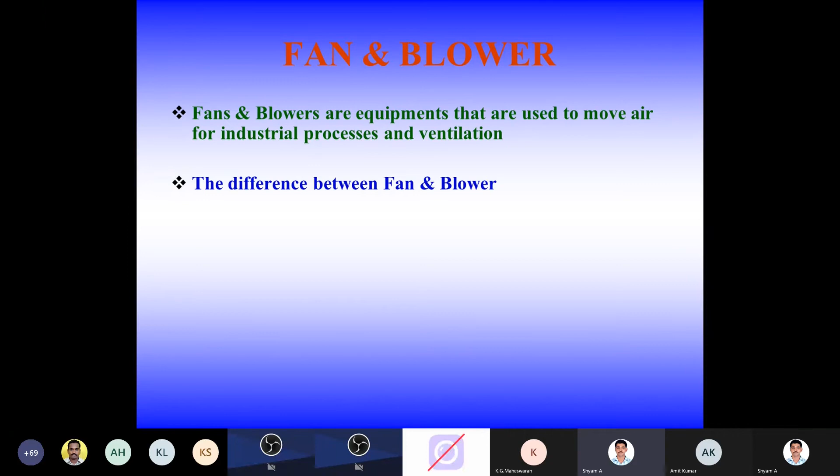Fans and blowers are equipment used to move air for industrial processes and ventilation. The difference between a fan and a blower is: fans will have a specific ratio up to 1.11 and a pressure rise of 1136 mm water column, whereas blowers will have a specific ratio between 1.11 to 1.2, where the pressure rise shall be 1136 to 2066 mm water column. Anything above this specific ratio and pressure rise would be called a compressor.

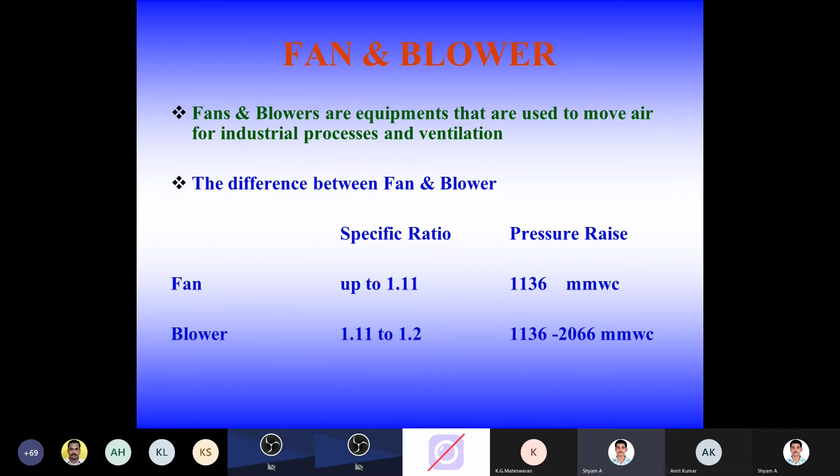So now we go into the types of fans. There are a few types of fans, like axial flow fans and centrifugal fans, which are widely used in the market. There are other types of fans also, like mixed flow fans, or you may call it an impulse type axial flow fan, or cross flow fans.

The major contribution in the industry are centrifugal fans and axial flow fans. Axial flow fans can have three types: propeller, tube axial, and vane axial. Centrifugal fans are of different types depending on the blade angle and configuration: radial straight bladed fans, radial tipped fans, forward curved fans, backward inclined blade fans, backward curved fans, and aerofoil bladed fans.

Though they are centrifugal fans, they may be named after the application. For example, in a power plant boiler, we may have an ID fan, a PA fan, and an FD fan. But all these are centrifugal fans; they are just named after their applications.

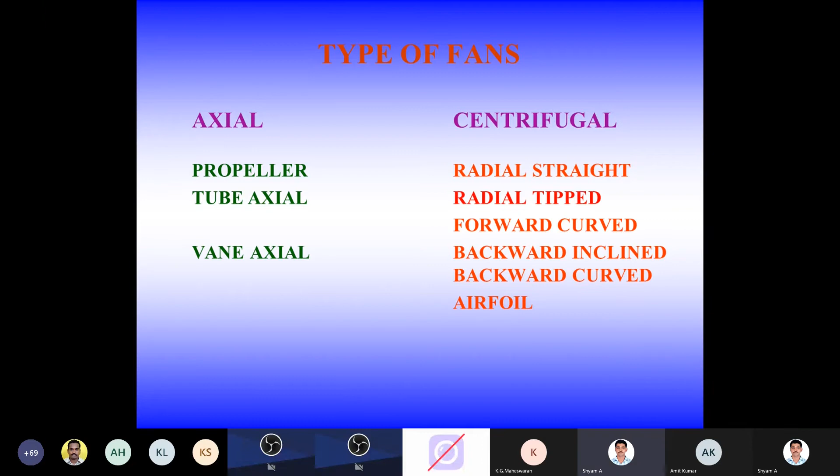How to differentiate? Axial fans are so called because the flow enters axially and leaves the fan axially. That is, the flow at inlet and outlet of the fan is parallel with the shaft axis, so it's almost like entry and discharge are at 0 to 180 degrees.

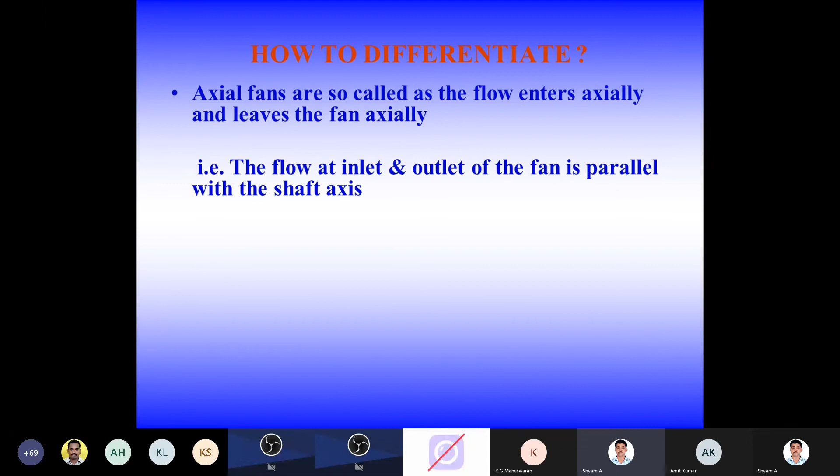The centrifugal fans have an axial entry and the flow leaves the fan radially. That is, the flow at inlet is parallel to the shaft axis and the exit is at 90 degrees from the shaft axis. So they may sometimes even be called radial fans, just because the entry is axial and the delivery is radial.

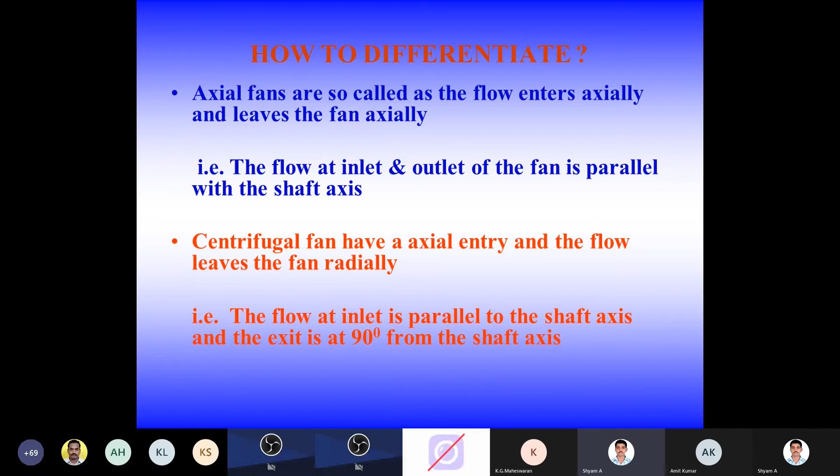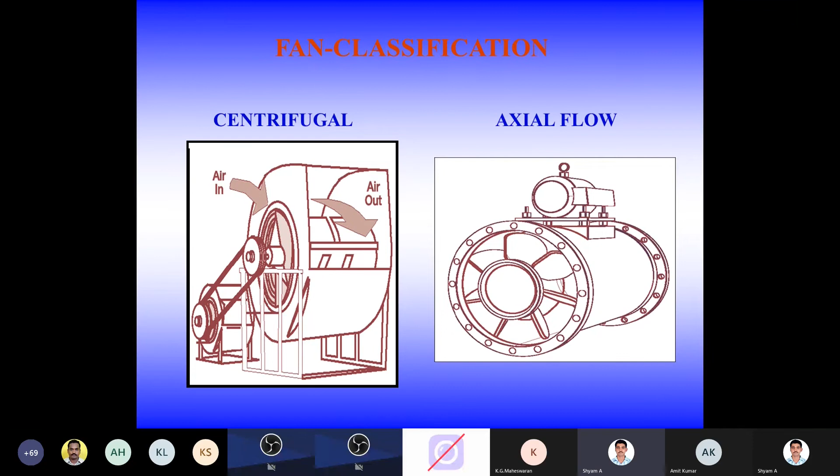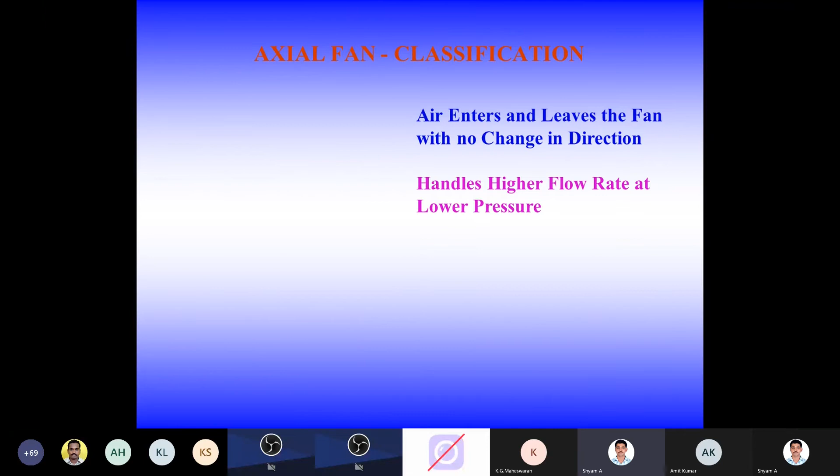So this is how a centrifugal fan will look and the axial fan will look. The axial fan classification is such that air enters and leaves the fan with no change in direction. These axial fans can normally handle high flow rates at low pressures.

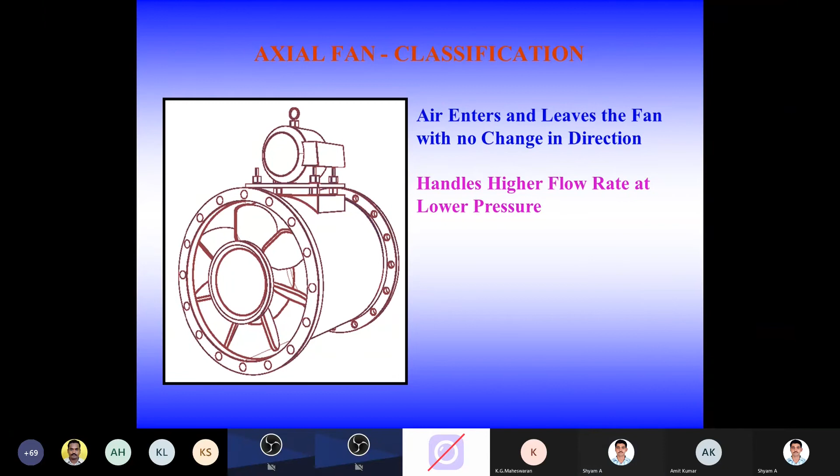The axial fan components shall be motor, blades, hub, and casing. In the case of a propeller fan, it is only the mounting bracket, blades, and the motor. In the case of a tube axial fan, this propeller fan may be installed into a tubular casing with the motor and the hub. The vane axial fan will be similar to the tube axial fan, with a vane at the inlet and outlet, or either one place. These vanes help the air by acting as an air straightener to the flow.

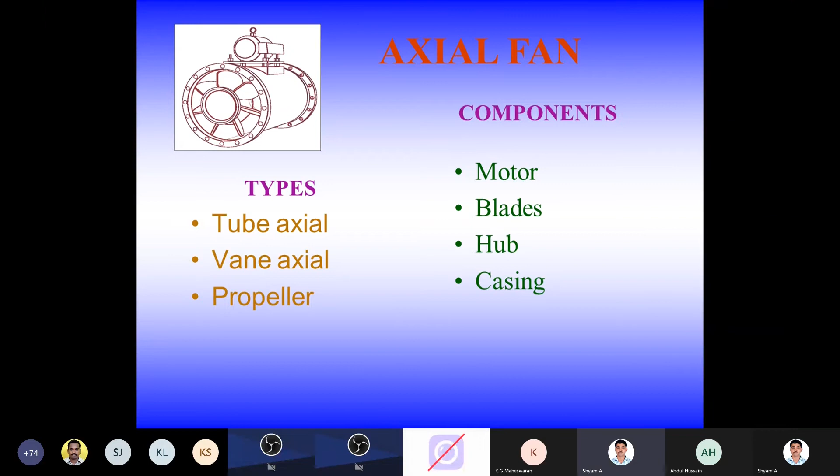Tube axial fans normally have their pressure range limited to 100 mm, but they can give a very high flow with high diameters. Their efficiencies are much limited, to around 65%. The wheel is in a cylindrical housing with close clearance. Only if the close clearance is maintained do you get a better efficiency, which I will show you in a picture in the later slides.

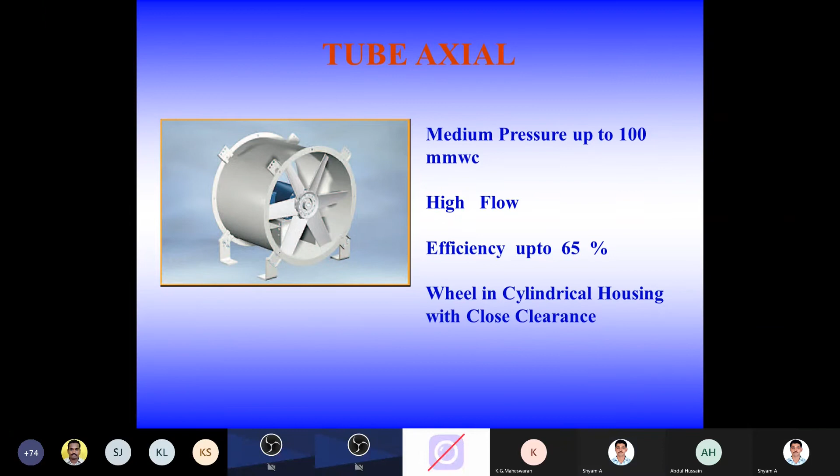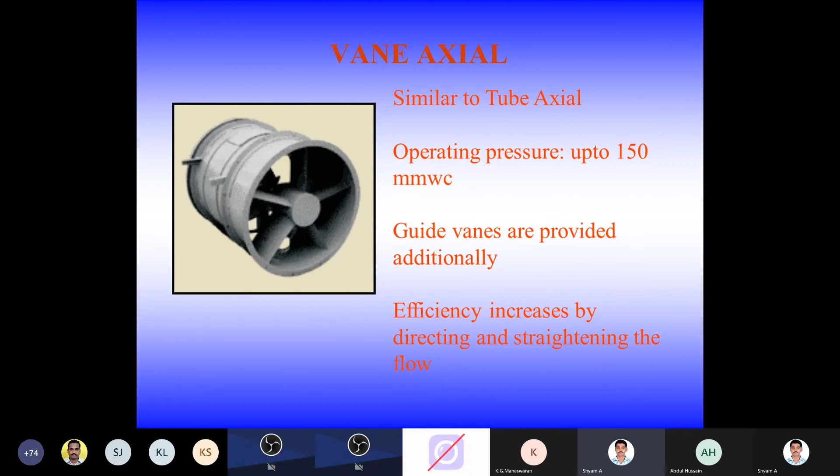As I told you earlier, these propeller fans are often used in indoor applications like exhaust fans, and even your ceiling fans also come under the propeller fan category. They run at a very low speed and moderate temperature. This can handle a huge volume of air with very minimal pressure, and the efficiencies are very low, even below 50%.

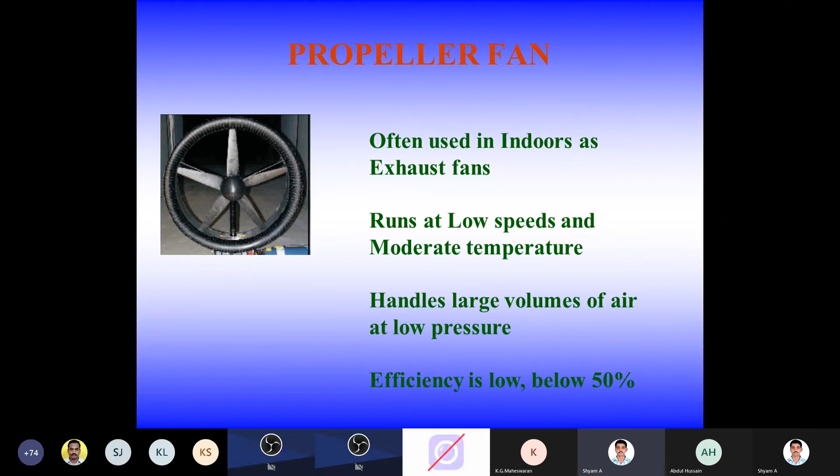Now, coming to the application of the axial flow fans, they are widely used in air conditioning and ventilation, that is HVAC, and they are also used for fume exhaust systems. They are used as booster fans in duct systems, and similar fans, now called jet fans, are used in car park ventilation and such. These vane axial fans are most widely used in tunnel ventilation and mine ventilation, because that is a place where you require more thrust and a greater pressure drop requirement.

So in the case of a centrifugal fan, the airflow changes direction twice, when it enters and when it leaves. It can generate high pressure per stage at lower flow rate. The number of stages is limited, whereas in the axial flow fan, the number of stages can be more.

But we have seen fans, we have even made fans with 5 stages, and they have been working successfully. Smaller sizes can be made even on a single rotor shaft, or individual bigger size fans will go from one fan to the other. So 5 fans at a stage, like in mini blast furnace applications.

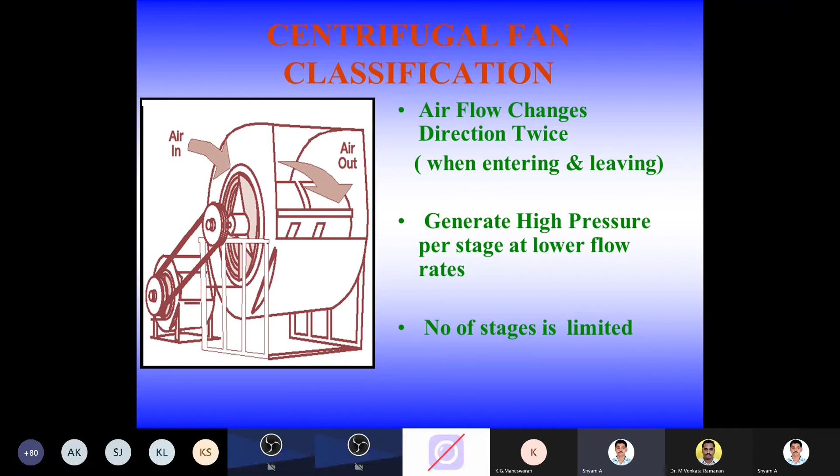As we discussed earlier, there are different types of blades in a centrifugal fan: backward curve, forward curve, radial blades, backward inclined blades, aerofoil blades, and radial tipped blades. So the components are the impeller with the hub, the motor, of course the prime mover, the casing, that is the spiral casing or volute casing as we call it, the inlet cone, and the shaft.

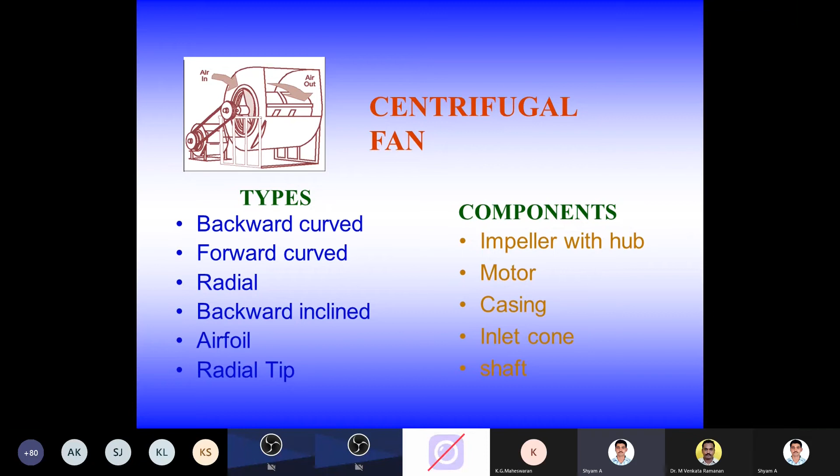So these are the components in a centrifugal fan, where apart from this you may have the drive pulleys and belt, or if it is going to be a coupled drive, then you will be having the coupling and the coupling guards.

The centrifugal fans can achieve high pressure. So pressures of even up to 3100 or 3200 mm are possible in a single stage centrifugal fan, but it depends on the volume also. Flow drops directly with the head, meaning when the flow is dropping on the curve, if you see the curve and the flow is getting reduced drastically, the head also drops drastically with it.

Useful in appliances that are not prone to clogging. So here there should not be any clogging, because fibrous material or something like that cannot come through this fan.

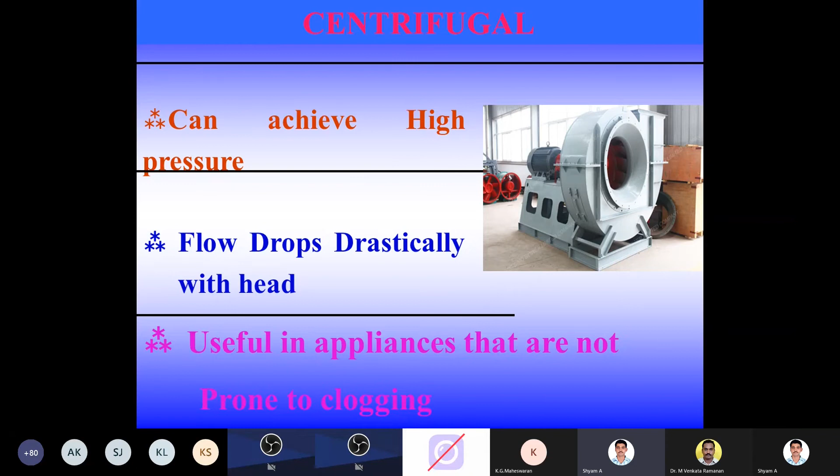Centrifugal fan blade design. In this picture, there is a casing, a spiral casing, and a rotor inside, and you will find the blades. You will find that there are 6 configurations here, and you can see the blades there.

Radial blade: a straight blade, nothing but a straight blade. It is attached to the hub, and these straight blades sometimes may have a shroud in the impeller. Normally the impeller will have a back plate, blade, and a shroud - these are the 3 components in a centrifugal fan impeller.

In a straight blade impeller, where some amount of higher granular material is coming into the impeller, we offer it without the shroud - it is called an open impeller. If there is a shroud, it is a closed impeller. This impeller has very low efficiency, but it can handle material. The blade has an inlet and outlet angle of 90 degrees.

To achieve better efficiency, something similar to this radial fan is a radial tipped fan. The radial tip fan will have a curve at the entry of the blade, where the entry is not at 90 degrees. This gives a smooth flow for the medium, but the exit angle would be 90 degrees - it is radially tipped. These can be used for higher efficiency, just to improve the efficiency. I will tell you the application in the next slide, where I will explain.

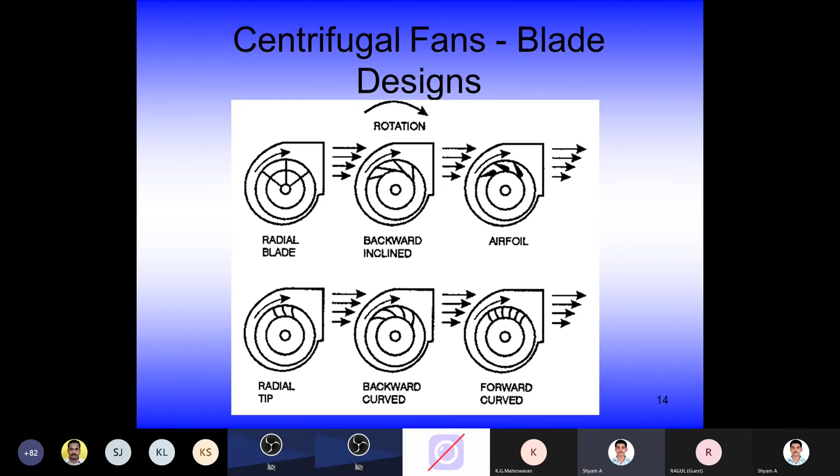Here we can demonstrate what would be the flow, pressure, temperature, airstream, and efficiency for all these impeller types. The radial will have a medium flow. It can give high pressure because of the blade angle. It can withstand high temperature. The airstream can even handle contaminated air. The efficiency is very low. As flow increases, the power increases.

For the radial tipped impeller configuration, they will also handle the same medium flow, high pressure. They can also handle high temperature and contaminated airstream. The efficiency is a little higher than the radial impeller, but not more than the backward curved impellers. There also, as the flow increases, the power increases.

Forward curve impellers have a higher flow, but limited pressure - medium pressure, not more than around 200 or 220. Their temperatures can only handle low temperatures. Airstream should be clean, because the number of blades is very high - they range from around 34 to 64, depending on the size. The efficiency is medium, and as the flow increases, the power also increases.

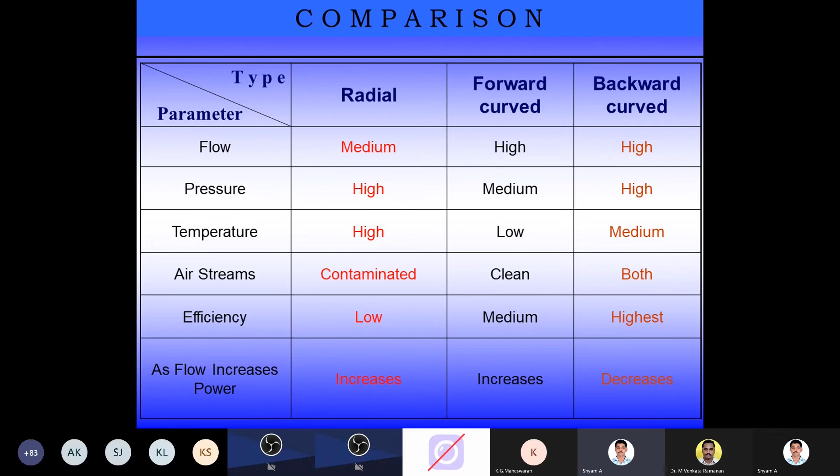Now the applications of various types of blades in the centrifugal fan, axial propeller, and vane fans. Radial fans are used in various industrial applications, suitable for dust laden air, moisture, and gases.

Forward curve fans can handle only low pressure, so they are suitable for HVAC. Packaged units are suitable for clean air.

Backward incline or backward curve and aerofoil fans are used in HVAC, but they may be huge in size compared to the forward curve in HVAC. In various industrial applications, such as FD ID or other process industries, centrifugal fans are used with backward curve or backward incline designs because of their efficiencies.

Propeller fans are used for air circulation, ventilation, and exhaust applications. Tube axial fans are again used for HVAC, and they can also be used in drying ovens.

Normally these tube axial fan blades are made of aluminum die cast, either gravity cast or, today, pressure die cast. They can also be made of non-metal blades like nylon, GRP (glass reinforced plastic), polypropylene, and other plastic materials.

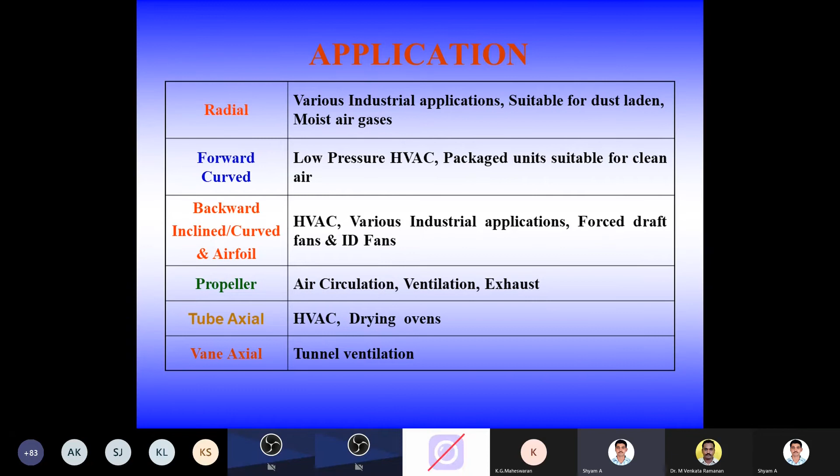Vane axial fans are used in tunnel ventilation. They are somewhat rugged because they are roughly used and continuously operate at high temperature. The blades are made of aluminum alloy, and they have vanes at the inlet and outlet, or sometimes only on one side, which straighten the air, giving a smooth airflow.

So here I am going to demonstrate the individual types of blades in the centrifugal fans. Why we are concentrating more on these centrifugal type fans is that 85 to 90% of the process industry power consumed is only by centrifugal fans.

Whether you take the cement industry, the sugar industry, wherever there's a boiler application, the metallurgy industry, the refinery, or even the fertilizer industry - these centrifugal fans consume more than 85 to 90% of the power used by fans in the process industry.

So they have a rugged blade design, and because the blade is at 90 degrees, they are called self-cleaning impellers, but their efficiencies are very low. So in today's technology, these type of impellers are not much used.

They are being replaced with radial straight, radial tip, or backward curve designs. So what happens is, if you go for a backward curve impeller, you may have to take care of the erosion, as I told you in the earlier slide.

Used for material handling due to blade strength, moderate to high pressure industrial application. The power rises continuously to free delivery - that is, once there's no resistance and the fan is at free open, that is free air discharge, the motor will overload.

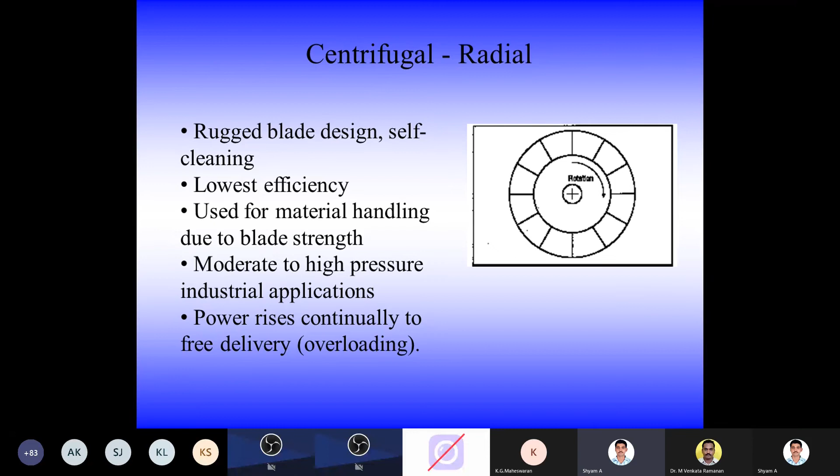The radial tip is just a configuration of the backward curved and the radial blade. So the blade is radial at the outer edge of the wheel, curved in the direction of flow as it moves inward. More efficient than radial blades, used for mildly erosive environments, with higher pressure than aerofoil fans or backward curve fans.

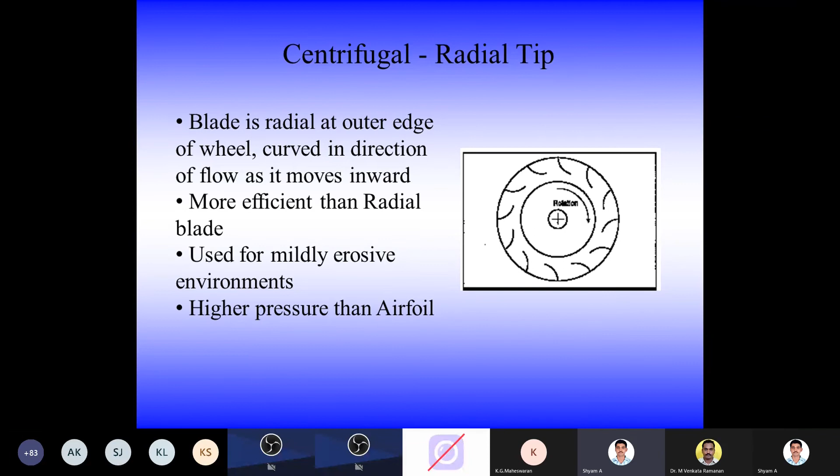The centrifugal forward curve impeller has blades curved forward in the direction of rotation, at about 90 degrees angle. Low pressure, used in HVAC applications and also in window ACs. Lower speed than other centrifugals because of their lightweight construction, with a single thickness blade and lightweight construction.

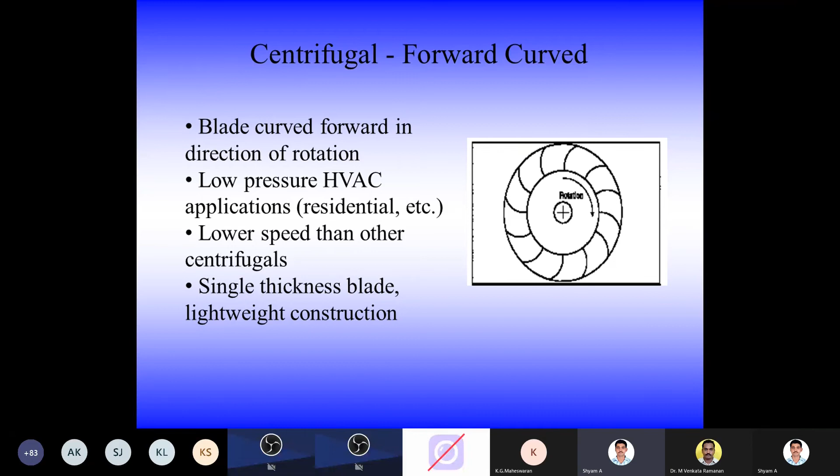Centrifugal backward inclined blades. So after the radial, you find the centrifugal backward incline. These impellers can discharge very high flow rate. Efficiency is slightly less than aerofoil design, but more than the radial tip impeller. Power reaches maximum near peak efficiency and then reduces towards the delivery.

This is a very important point in a backward inclined blade. At any point of operation, at a given temperature and given speed, this fan, even at free discharge, will not overload, because as you go through the curve, the power curve will not be in the rising direction. At the end of the curve, it will drop back. So these fans are almost called limit load fans.

Consideration for use in applications where aerofoil blade erosion is a concern. I told you in the previous slide, aerofoil blades cannot be used in applications handling dust. The reason is it may erode the blade, and the hollow space inside may get filled with dust particles, which may increase vibration due to imbalance.

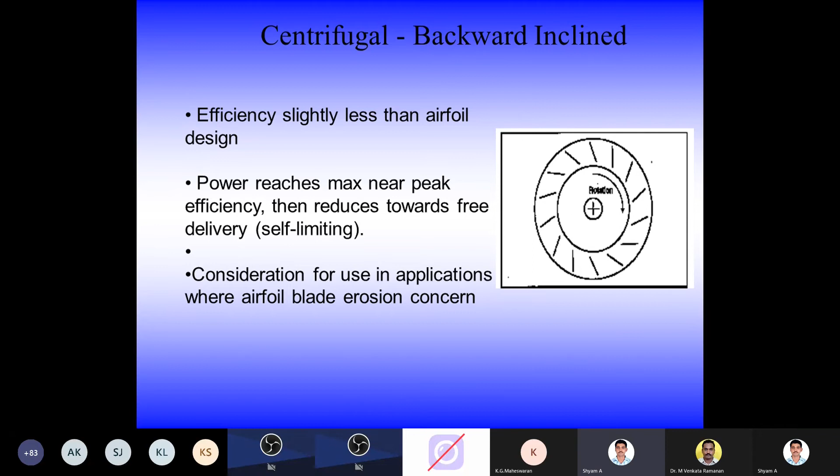The centrifugal backward curve fans have blade angles less than 90 degrees. They are inclined and curved. The power reduces towards free delivery.

These are also, in some cases, if they are not high pressure, not narrow impeller, but a high width impeller, then they are also limit load fans. They promote smoother flow than BI, that is backward impeller, backward inclined fan.

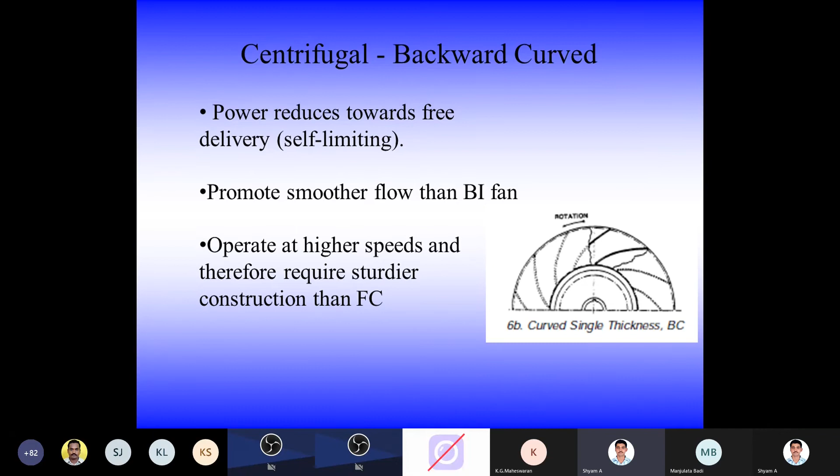These impellers can operate at very high speeds and therefore require sturdier construction than forward curved ones. But the temperature here is limited. You cannot go beyond 380 to 420 on the backward curve impeller because of the stresses acting at the edge of the impeller. In that case, we would always prefer to go for a radial tipped impeller or a radial straight bladed impeller.

The centrifugal aerofoil blades curve away from the direction of rotation. It is something similar to the backward curve, it is a backward curved impeller only, but the blade is formed in the shape of an aerofoil, which improves the efficiency, reduces the noise level, and gives the highest efficiency, relatively low noise, and high structural strength.

Power reaches maximum near the peak efficiency, then reduces towards the free air delivery. Again, these fans are also limit load fans, but not in all applications. It depends on the width of the impeller. If the impeller is narrow and high pressure, it may not apply. Only if the impeller has a broad width and lower pressures, like up to 200 mm, then they may be a limited load fan.

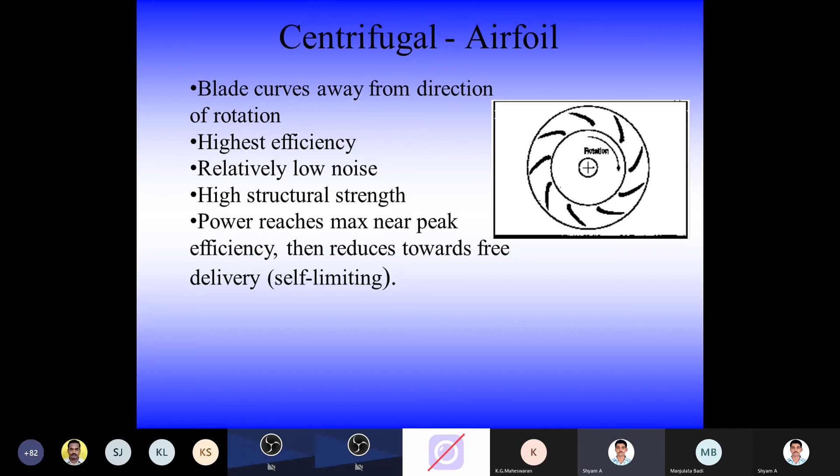Axial type fans we have already seen, but I would like to mention the pressure ranges here. Propeller fans generally operate at 5 to 50 millimeters water column. They are inefficient, with a steeply rising power curve, so their power increases when the pressure increases. It is the opposite of the centrifugal fan.

Tube axial fan: propeller mounted in a cylindrical tube. The pressure ranges up to 100 mm water column. These are also overloading type fans; if the pressure rises, the power rises.

Vane axial fans utilize guide vanes to recover the rotational energy, and they can give a pressure up to 250 mm water column in a single stage. Again, they are also overloading fans; as the pressure increases, the power increases.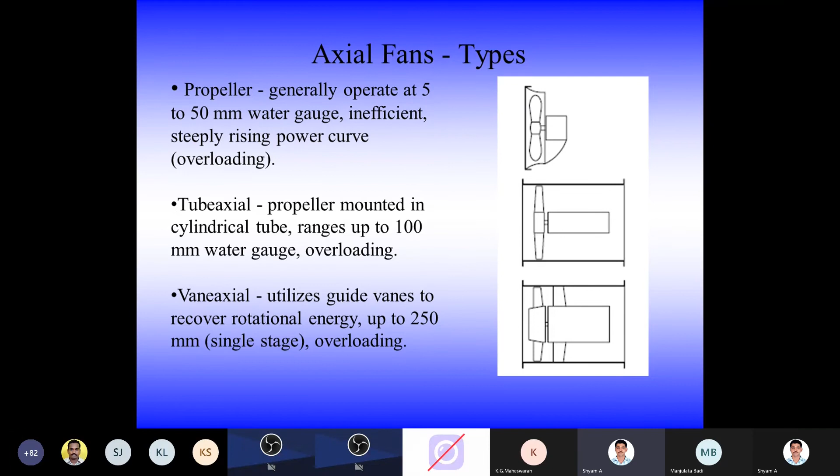See the definitions. What is static pressure? The difference between absolute pressure at a point and atmospheric pressure is called static pressure. The dynamic pressure is the rise in static pressure which occurs when air moving with a specified velocity at a point is brought to rest. So total pressure is equal to static pressure plus dynamic pressure.

So when we go for an audit on a fan, we should know that static pressure acts in all directions, and dynamic pressure, also called velocity pressure, acts only in the direction of flow. So the sum of these two is the total pressure.

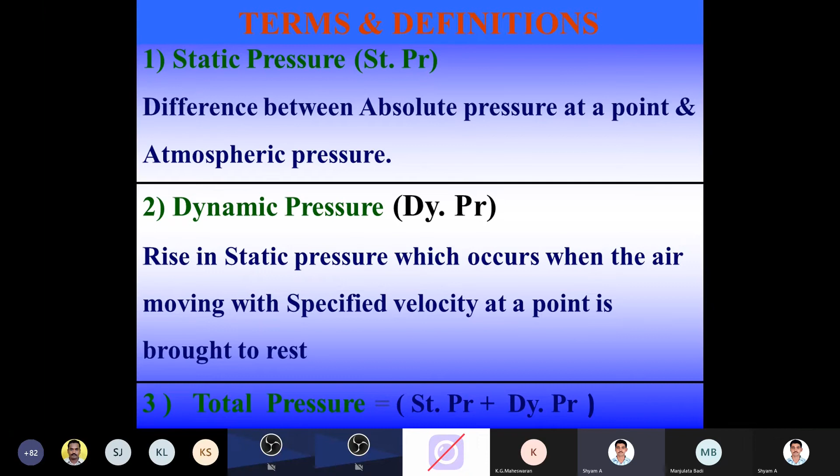How to calculate the efficiency of a fan? The fan or blower has two efficiencies: one is the static efficiency and the other is the total efficiency. So we have to calculate the static efficiency as Q in meter cube per second into pressure, static pressure in mm water column, or otherwise kg per meter square.

That is, 1 mm water column is equal to 1 kg per meter square, divided by 102 into input power into motor efficiency. Motor efficiency we can get from the nameplate data of the motor or from the data sheet. So input power is measured.

So what is 102? You are converting the output Q into H. By dividing it by 102, it becomes kilowatt. So on the upper side you have kilowatt, and below you have power in kilowatt. This will give you the efficiency.

So in place of static pressure, if you use the total pressure, it gives you the total efficiency. Normally, when a fan procurement is made or audited, we have to take into consideration the static pressure and static efficiency only.

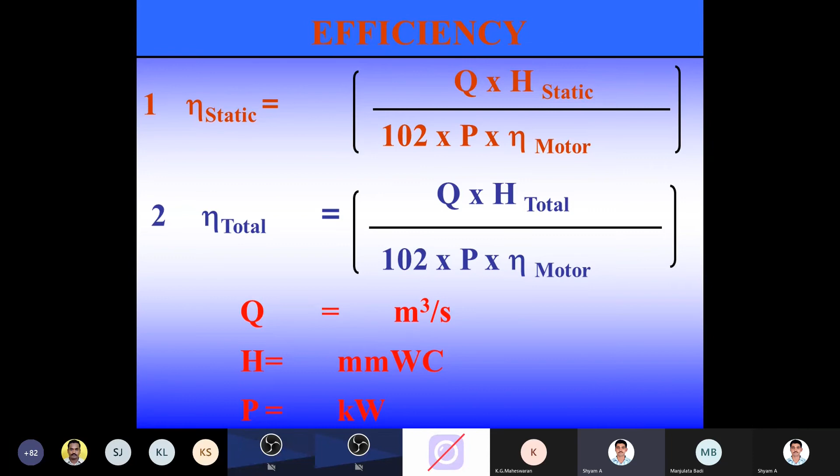Fan characteristic can be represented in form of a curve under a specific condition. The fan curve is a graphical representation of a number of interrelated parameters such as the volume, the static pressure, power, and the efficiency.

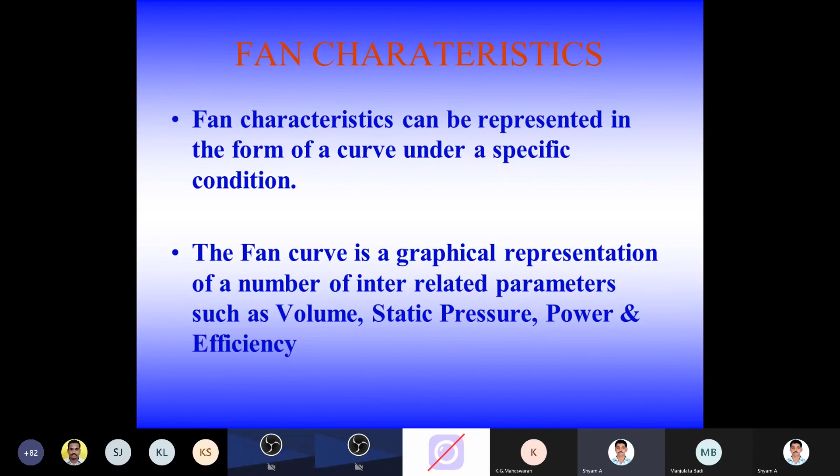So whenever you want to study a fan, before going into the audit or performance study of a fan, we need to obtain the performance curve from the client, because they would have got the curves from the supplier in their records. The curve is going to be very important for us to ascertain the design parameter of the fan, how the curve is being tested in the test block condition, and where the fan operates on the curve now. Only based on this you can ascertain what you have to do with this fan to reduce the energy consumption.

So this is the curve. You are seeing a yellow line, that is the efficiency curve, but the blue line is the performance curve, which is volume versus pressure. The flow is mentioned in CFM, and the pressure is in inches water column. The blue line is the performance curve when you test a fan in a test block condition, as per IS standard or BS standard or AMCA standard.

You need to have a test track, and you are creating a resistance artificially in the test track, and you are going to measure the velocity, static pressure. The velocity is converted into velocity pressure and then calculated with the track area to Q, that is the flow.

And the power curve, in BHP, that is the green curve. The power curve is the measured power either directly from the panel board, or the amps, power factor and all this may be individually recorded and then calculated. The input power may be calculated. From the parameters of both curves, you can arrive at the efficiency curve using the efficiency formula.

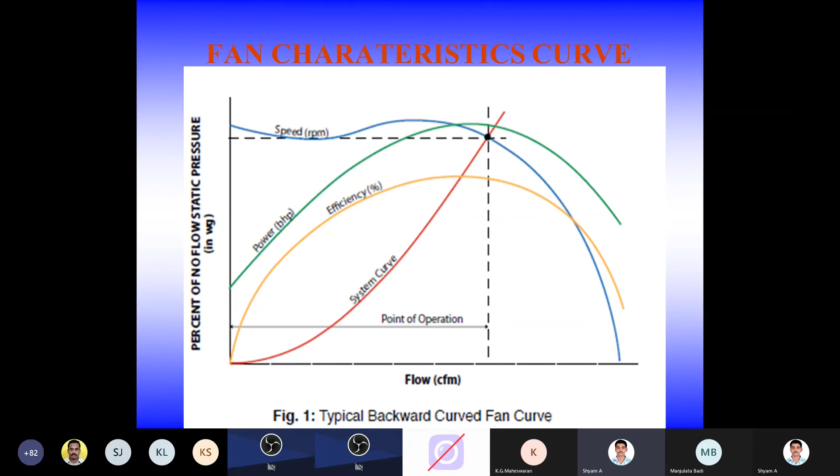So the system resistance curve is completely independent of the fan performance curve. This is a very important point which most people may not be aware of. They may think that the fan operating conditions at the site where the fan is used will only fall on the performance curve, that is the test block performance curve. No, the system resistance curve is completely an independent curve.

The two curves intersect at one point where fan performance meets the requirement of the system. That is the dark point which I showed you. The system resistance curve is described by the equation P is proportional to Q square. In case you want to enhance or decrease the performance of the fan, you have to only go by this formula.

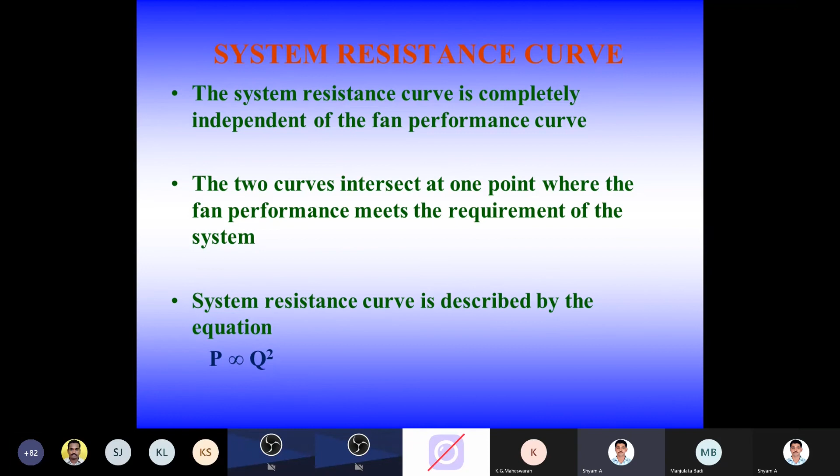This is the system resistance curve and the fan curve, so you have an operating point. When you throttle this fan or reduce the RPM, by using a VFD, your point will only fall as you reduce the speed or throttle the inlet vane control. Your point will fall on the blue curve only and not on the red curve.

And as I told you in the previous slide, this operating point will not be exactly as it is mentioned in the performance curve, because it will vary depending on the pressure in the system. For example, let us consider an ID fan where the pressure is 300 water column designed for and 10 meter cube per second. So this operating point is falling on 10 meter cube per second and 300 water column.

But when you go to the site, you have different resistance on the inlet of the ID fan. For example, you may be maintaining -5 to -10 water column in the boiler furnace, and then you may come out and there might be an economizer where there is a resistance. You will need some pressure drop across this economizer, and after that you have the air preheater where again that is a resistance.

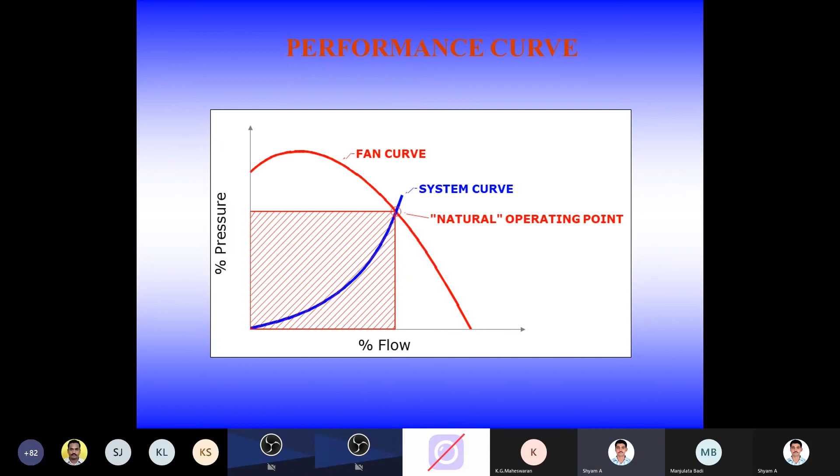Fan laws. See, the fan capacity is directly proportional to N and D cube. N is the RPM, so it is directly proportional to the change in the RPM, and it is directly proportional to the cube of the diameter differences.

So pressure is directly proportional to N squared and D squared. Power, capital N power, is proportional to N cube and D to the power 5. So when we size a fan by diameter, we use this formula on the standard diameters of the standard designs, and to arrive at the RPMs, we use this formula.

So these formulas can also be used by energy auditors when they find that a fan is delivering more volume of air, maybe it's oversized or undersized, then they can use these formulas in altering the RPMs without considering the D, to arrive at a better

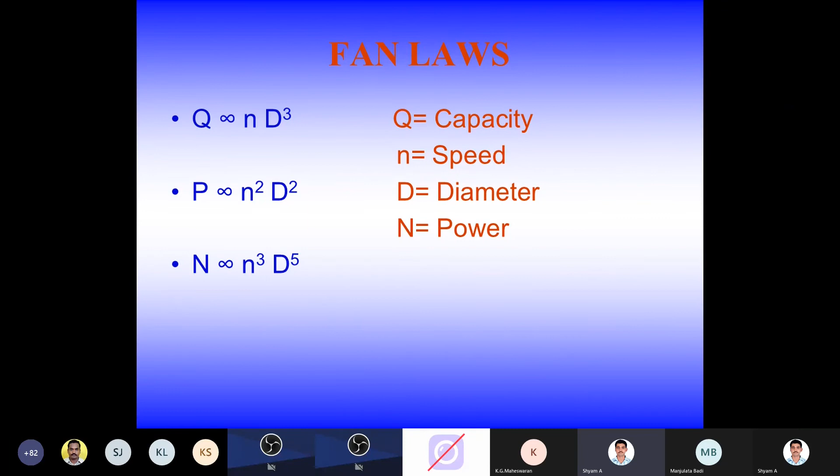So now we go into the energy conservation point. Before going into that, can I ask you if you have any doubts on these selection procedures of fans? Because I would like to say something on that. Okay, let me first complete that.

The poor initial system design or fan design contributes more to the loss of efficiency. Likewise, a tailor-made fan is designed particularly for parameters like volume and pressure, maintaining an efficiency of more than 80%. Whereas with standardized size fans, like size 710 and 800, your fan will not be accommodated in 800 because the efficiency will be low since the fan is bigger, and you cannot accommodate it at 710 where efficiency is again low because it's smaller in size. So what happens? You are in between.

But some companies don't supply anything in between. They'll say either take this or take that. So there you are bound to compromise on the efficiency, thereby paying more on your energy bill for power consumption. So it is always recommended you buy a fan only at peak efficiency.

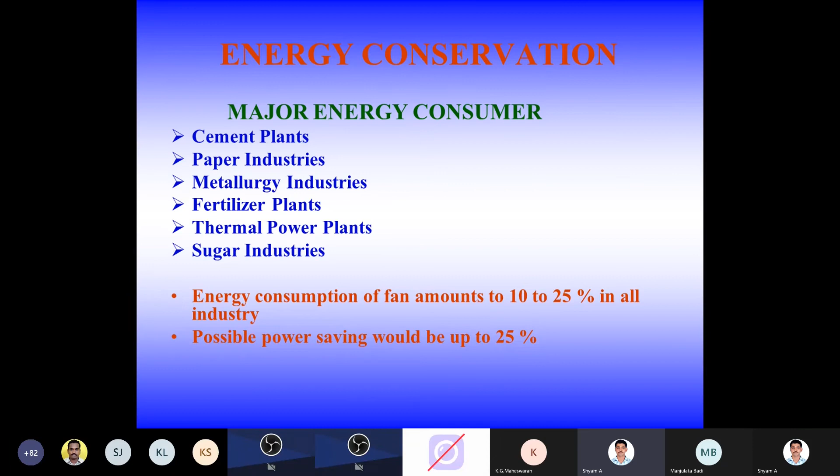So there was not a big deal. It was only the fan sizing was very big. We had to reduce them, and we also reduced the duct velocities. So only by these two things, changing the fans to high efficiency fan and designing the fan to the right requirement of capacity and static pressure, bringing down the velocity also, we were able to achieve a power saving of up to 35% in the tobacco industry. So these are the industries where major power consuming fans are there.

So what are the parameters that have to be considered? Volumetric flow rate, pressure head, temperature and density. See, if it's a normal hot air, then the temperature alone will do.

But if it is going to have, in the case of fertilizer industry or in the case of some chemical handling industry, then we need the composition of the flow medium to calculate the density, because the density plays a vital role in designing the fan size.

Based on the pressure, the medium to be handled. This is mainly for the case of whether we need to go for special coating on the blade for erosion, or special coating like FRP, FRV, or go for special material as SS304 or 316 in case of acidic air. So only to ascertain that part of it, we ask for the medium to be handled.

Then the space limitations. So the space limitation also, when you go for slower speed, because the slower the fan speed, the erosion is lesser. So in that case, when we consider if there is no space, then we may have to discuss with the client and find some other place which may not be recommended by the client. So we ask in advance what is the space limitations there.

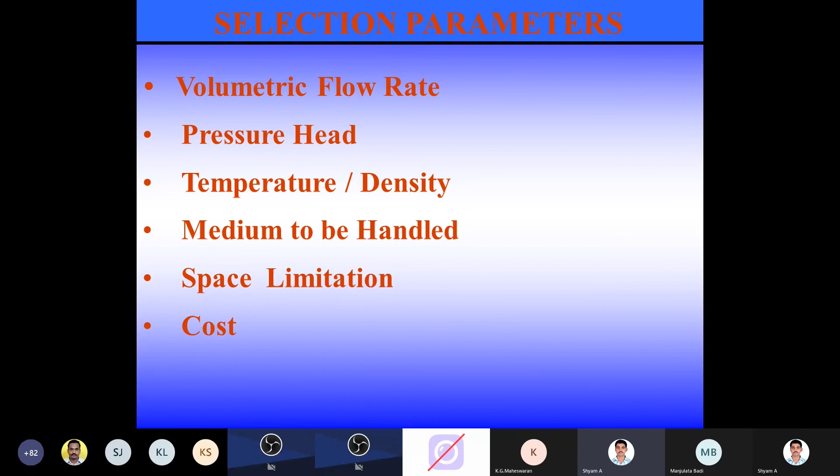Reasons for higher power consumption in fan. As I told you, improper sizing and selection of the fans. So the selection of the fans can be basically based on the type of industry and application.

So the application calls for it, you can go for a higher speed fan, or if you are going for slower speed fan, you can go for that. So all this, the selection is basically, as I told you again, the optimum efficiency is very important. That is static efficiency. You have to calculate whether the fan will deliver the parameter for the efficiency.

So all this is very important. And also the outlet velocity of the fan. Nowadays, like for air conditioning, they specify it has to be less than 8 or less than 10 meter per second. So the selection type of blades to be decided. So the improper sizing and selection of fan is a very important aspect.

Fan operating with dampers for various process load conditions. So if you have 2-3 MCR points, like maximum continuous rating, maybe you have 2-3 operating points for your process. Maybe one is design, then one operating point, or then another offset operating point, like 2-3. Then it is very difficult to arrive at each and every operating point with dampers.

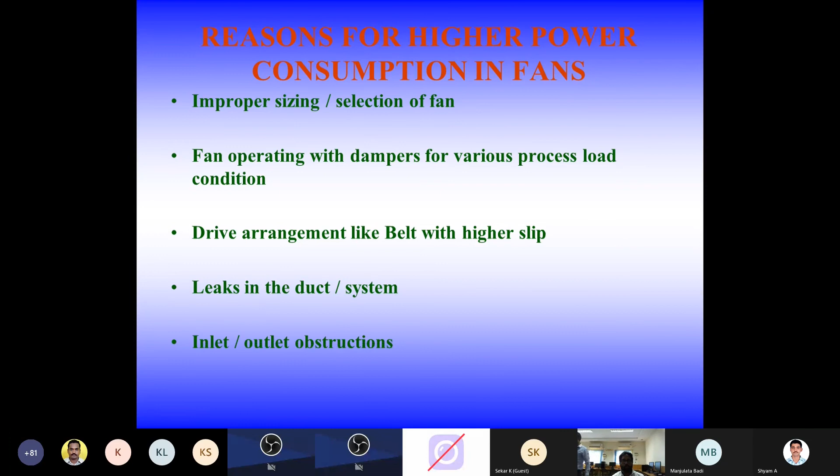The next part would be how to audit a fan. First and basic thing would be to collect the fan nameplate data, fan curves available, fan and gear drawing available with the customer, and the motor nameplate data. If motor data sheets are available, that also. And the system layout - we need to get the system layout, or make a hand sketch of it, in order to ascertain the measuring points.

Measure motor input power directly from the control panel. Measure fan and motor speed, which is one of the prime factors, because any easy modification to arrive at a parameter, only the motor speed is something we can handle very easily. Measure static pressure at various points of the system.

This is very important because it helps us ascertain where the pressure drop is in excess of normal. Let me go to the same example, the boiler ID fan: minus 5 to minus 10 mm water column in the furnace, then there is a ducting, then you have an economizer. The economizer will be having a pressure drop of something around 60 mm water column.

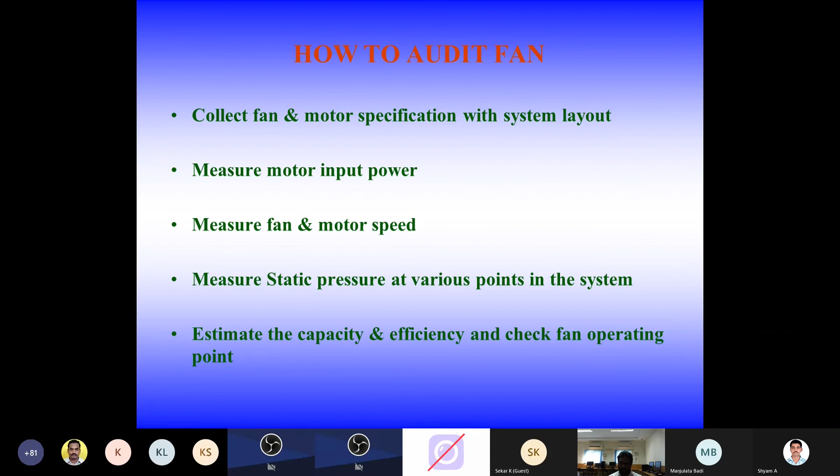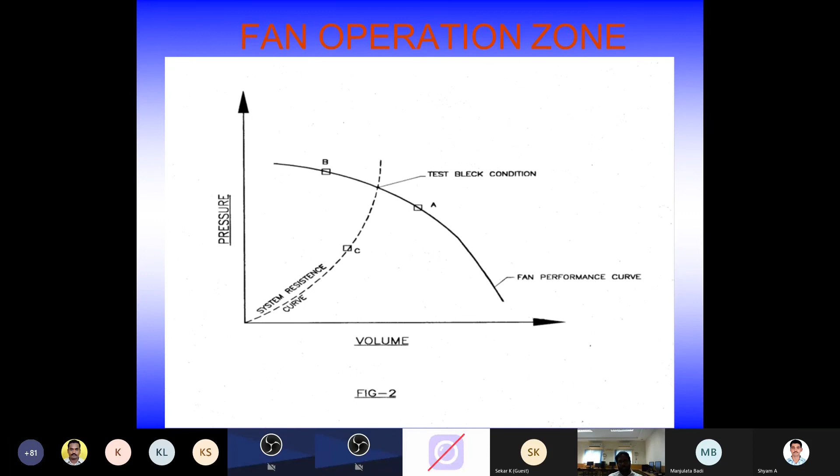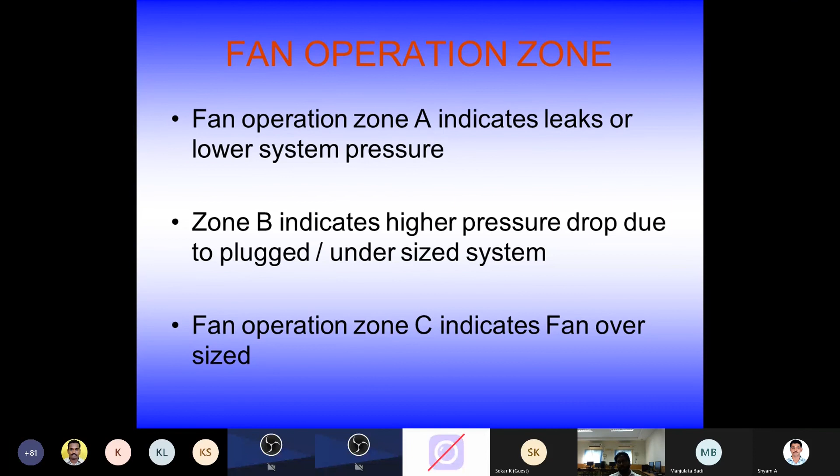This is also covered in the next slide: fan operating at zone A indicates a leak or lower system resistance. Zone B indicates higher pressure drop due to a plugged or undersized system. Fan operating at zone C indicates the fan is oversized. Once you get the curve from the client and measure the parameters, mark the point on the test condition curve, and you will understand the condition of the fan - either A, B or C. Mostly it is A or C.

So the 5-point formula for energy conservation is: match demand and capacity - match the capacity with what is required. Avoid unnecessary demand, meaning you should not have a higher factor of safety, which affects performance through lower efficiency and higher power consumption. Select the correct drive system - it should not be inefficient like the old model of V-belt pulleys. Wedge belts are far better, and we always recommend flat belts for better efficiency. If not, you can select a fan at 1440 RPM or at the synchronized speed of 2-pole, 4-pole, 6-pole, or 8-pole, which would then be direct coupled.

In smaller size fans, it can be directly mounted on the motor shaft, where your losses on the drive arrangement are minimized or even eliminated. Use energy efficient fans. Whenever we procure a fan, we have to ensure the static efficiency of the fan is at the highest, not just what the supplier gives you at 65% or 68%. If that can be improved, it is always better to buy that fan, because the energy you save is going to save you money.

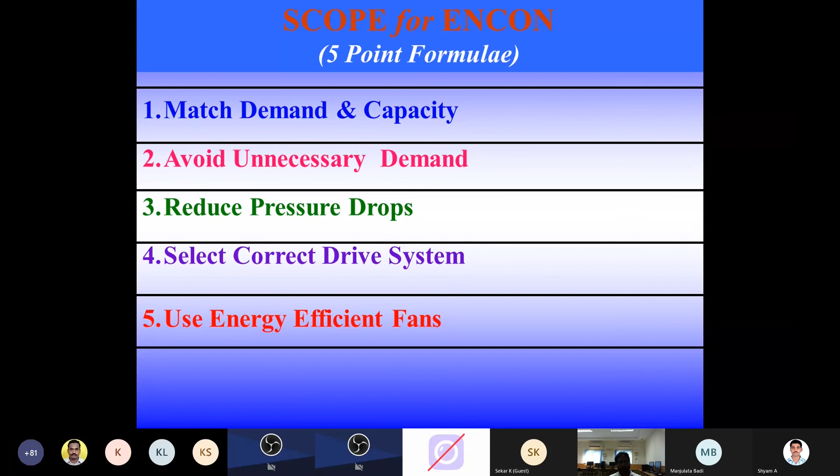So match demand and capacity. Selection of the correct size fan in terms of H, that is static pressure, capacity and efficiency. We have come across many people even today, after so much education on energy conservation and power bills, who still come and ask us, give me a 5 HP fan, a 10 HP fan, a 20 HP fan. They don't understand that for the same HP, you can have a high pressure low volume fan, a medium volume medium pressure fan, or a high volume low pressure fan. So Q, H and efficiency are very important. Kilowatt and HP are not important, as it is a function of Q, H and efficiency.

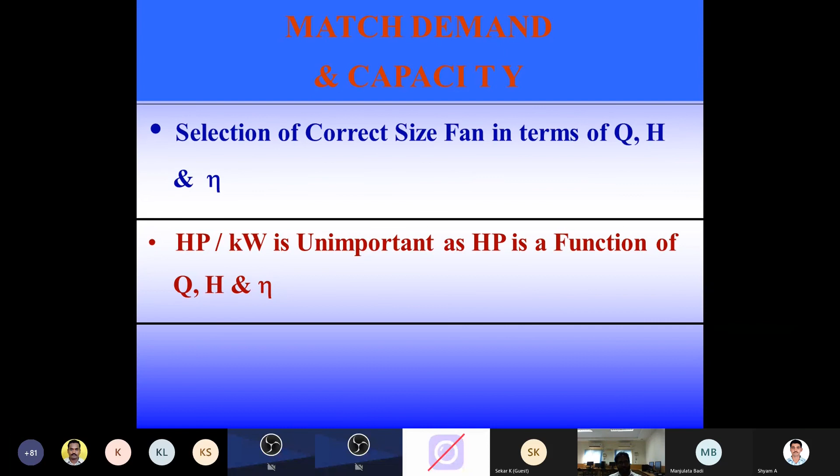How to match the flow and head? There are flow control options: outlet damper control, inlet vane control, and variable speed drive. It's very important to understand these three control systems and how they contribute to energy saving, or don't.

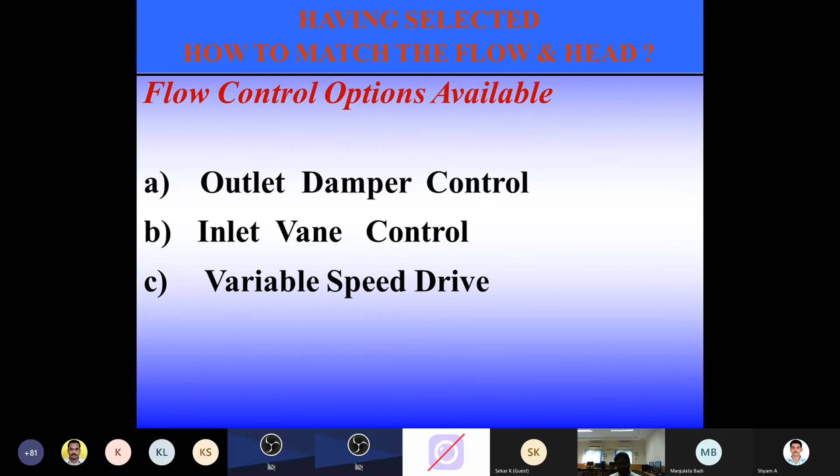This is inlet vane control, also called variable inlet vane control. It provides a pre-rotation or spin to the incoming flow in the direction of impeller rotation. This is very important. It must be located only at the inlet of the fan, immediately at the fan inlet flange, not somewhere else in the inlet line. At every position, for example 100% open, it is free flow with its own curve, and at 75%, 60%, 40%, 25%, it generates a family of curves, meaning volume versus pressure and volume versus power, which we will see in the following slides.

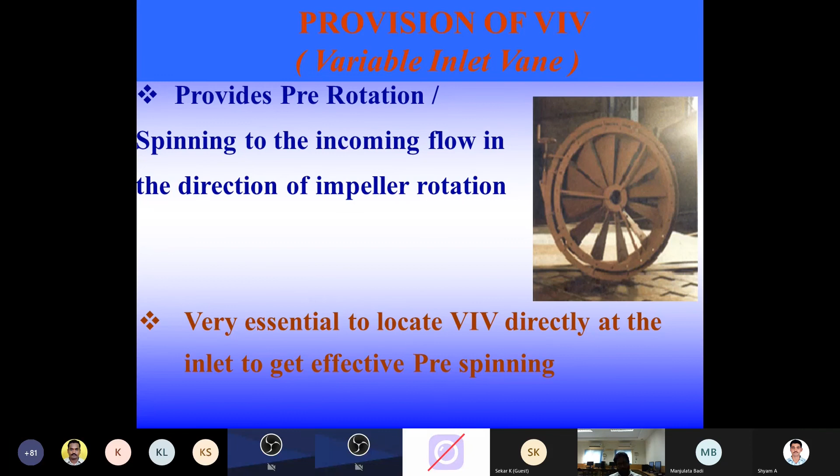Now, fan performance with outlet damper. You can see the fan performance curve in the dark line, and the dotted line denotes the system resistance curve, so your operating point is coming down. Once you use an outlet damper, it is nothing but a resistance. It throttles your volume, and then what happens? The power is not reduced.

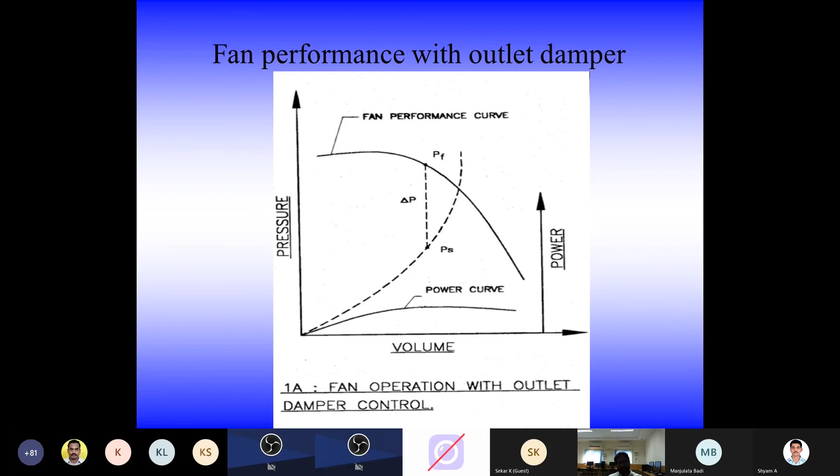The actual operating parameter is PF, not where the dotted line is intersecting. The next point to the left is the actual operating point, but it is operating at PS now, at the system resistance curve below. The vertical dotted line denotes the loss in pressure. So the power is the same, and you will be losing much on the power. In other words, you are killing the energy with the outlet damper. So we normally don't recommend outlet dampers in the fan for flow control; it is only used to isolate the fan in case service has to be taken.

Fan performance with IVC, inlet vane control or variable inlet vane, is the same concept. Here it denotes a family of curves. You can see the first curve at 90% opening, that is 90-degree opening or 100%, then at 70-degree opening, 50-degree opening, and 30-degree opening. Similarly, it follows with a power curve, a different power curve for every degree of opening.

So here, when your operating point is at PF and you are operating at PS, at 70-degree opening you are able to throttle, and there is a decrease in the power. So by using inlet vane control, you are saving some amount of power. This is one method, and the cheapest method, of controlling flow in a fan, whereby you save some amount of energy.

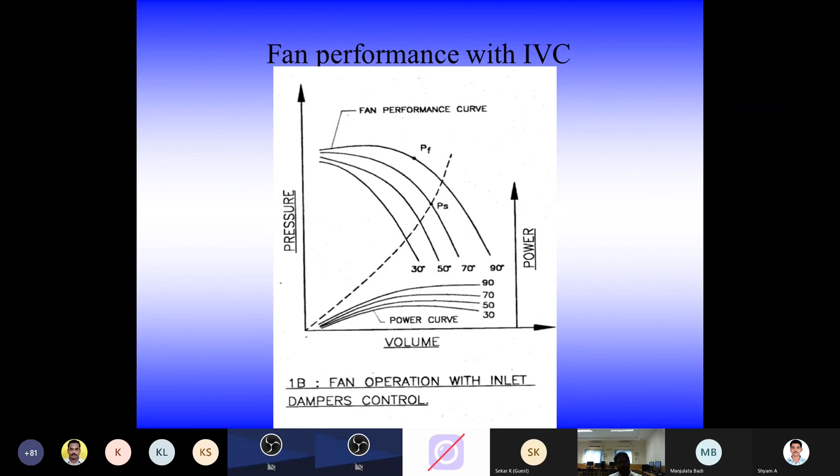Fan performance with the VFD, the variable frequency drive, where you can vary the speed. You have two curves here: the top one is full speed and the bottom one is partial speed. When you want to operate at a parameter at partial speed, you achieve it, and both curves come down parallelly. The power curve also shows a very big change, so you get a good power saving with the help of the VFD. The efficiencies will not be altered much, except for 1 or 2 units.

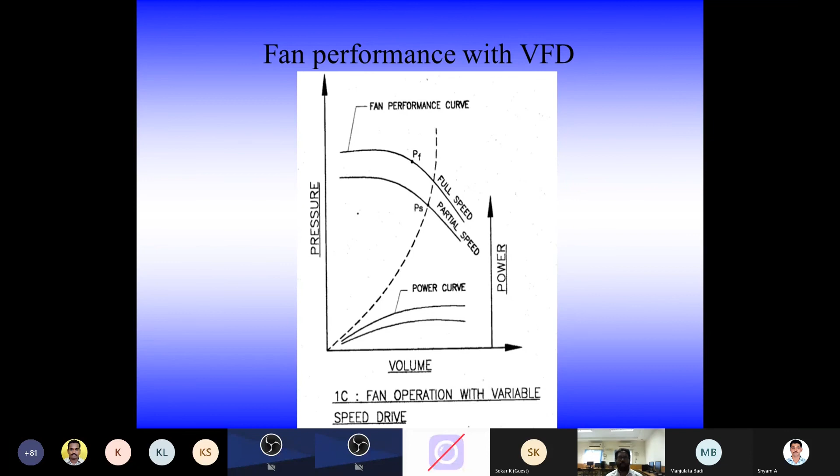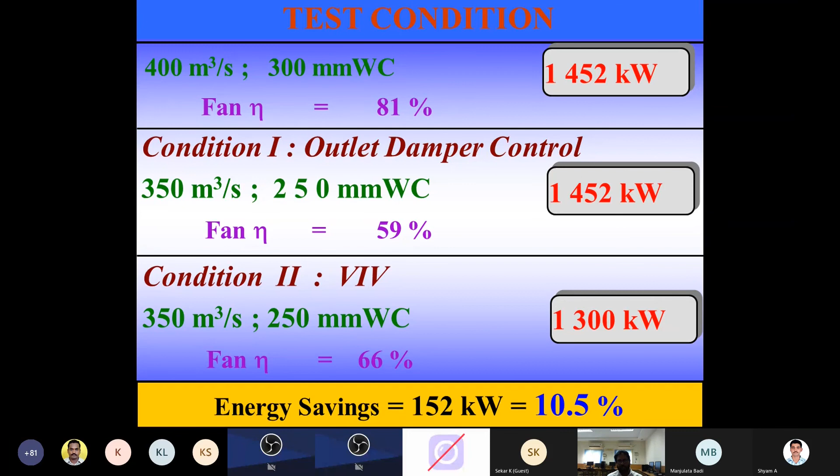But in the condition of a variable inlet vane control, you can see you are achieving the same parameter, 350 meter cube per second and 250 mm water column, at an efficiency of 66%, because that has a different power curve. It generates a different family of curves for different opening conditions or opening degree or opening percentage. So whereby your power absorbed is only 1300 kilowatt. Energy saving is 152 kilowatt using a variable inlet vane control. Therefore 10.5% is the power saving directly just by understanding what damper to use for flow control.

Use of VFD is most effective. As speed is reduced, flow and head are also reduced, therefore reduced power consumption. Fan efficiency is relatively constant; there is no alteration in the fan efficiency. Reducing the speed by 50% typically results in a reduction of efficiency by 1 or 2 percentage points. This is because once the speed is reduced, your motor efficiency also marginally drops, and as per the fan curves also, 1 or 2 percentage points you reduce.

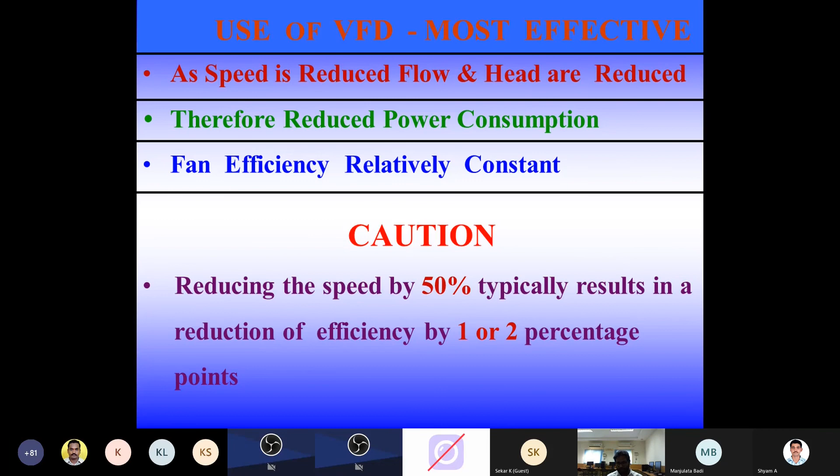This denotes kilowatt versus speed. As the speed increases, your kilowatt rises. As I told in the fan laws earlier, when the speed changes, the kilowatt rises to the power 3.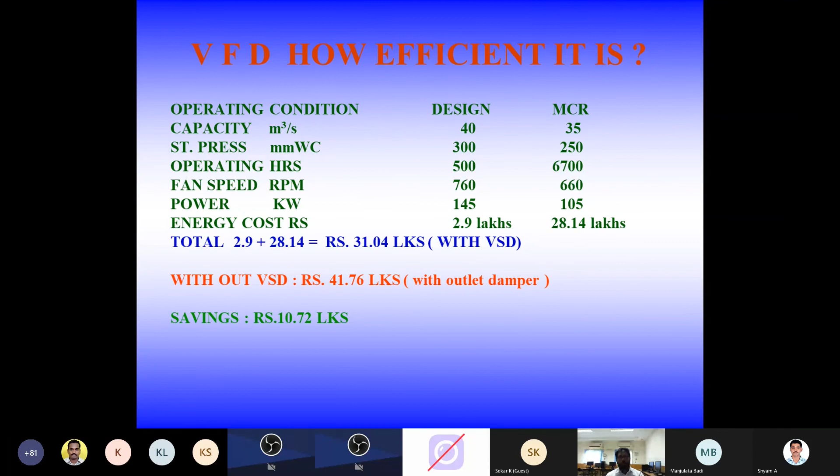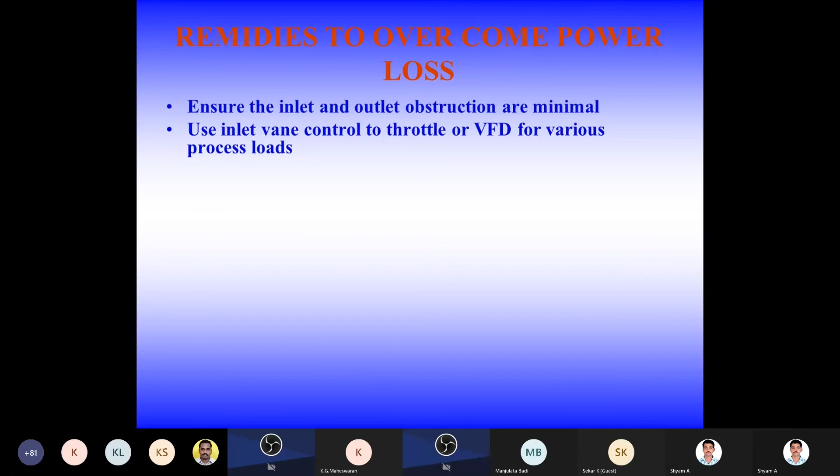So, remedies to overcome power loss: ensure the inlet and outlet obstructions are minimal. I will explain this with the following slide. Use inlet vane control to throttle, or use a VFD for various process loads.

When we talk about various process loads, if you are using a VFD or an inlet vane control, you can automate the inlet vane control and the VSD, connecting them together. Based on your process load, they can be programmed to vary the speed or vary the damper conditions, so they can be automized. Wherein you don't need anybody to control it, automatically it can be looped with the panel board with the VFD or the actuator to operate the damper.

So you need to select an operating point. Suppose it is an ID fan, then your operating point will be the negative draft in the furnace, like 5 to 10 mm on the minus side. To maintain that, automatically your variable frequency drive will change the speed of the fan, or the damper-controlled fan will have its damper automatically throttled. If you have this interlink arrangement in the system, you will save more power. Change the fan with a high efficiency fan.

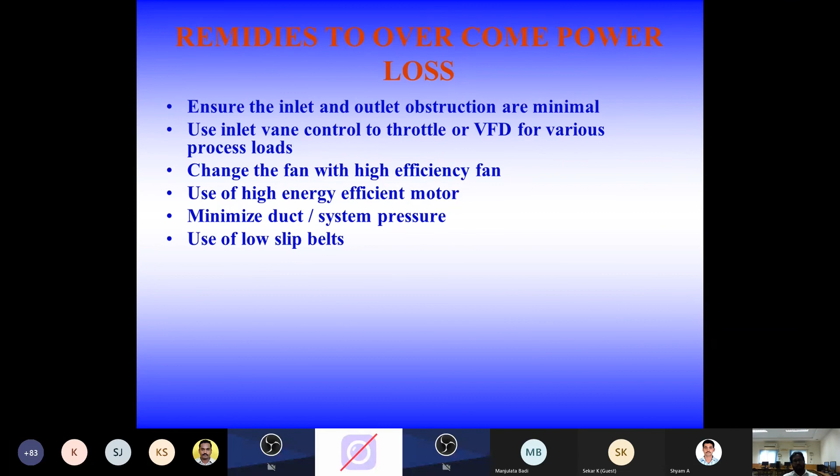Use low slip belts. Ensure fan intakes are smooth and rounded. Clean screens, filters and blades regularly. This is one aspect which is not done. The blades of the fan need to be regularly cleaned. The filters and screens particularly have to be cleaned, because once they are clogged with dust, they need more pressure in order for the air to pass through, and that is going to increase the energy consumption.

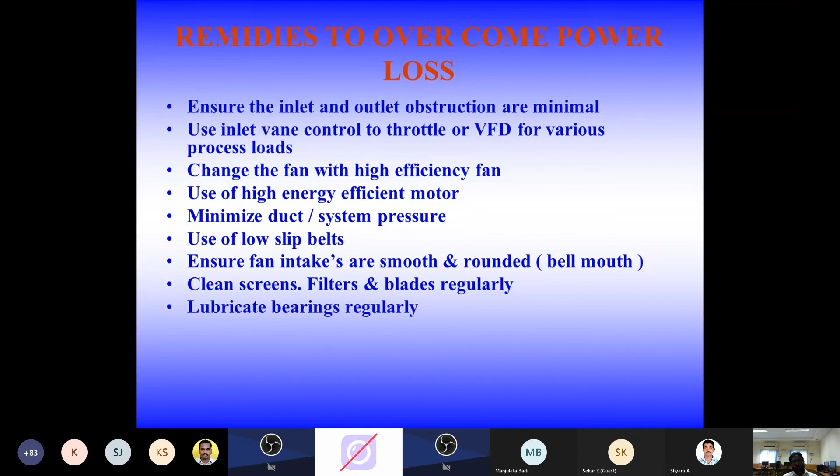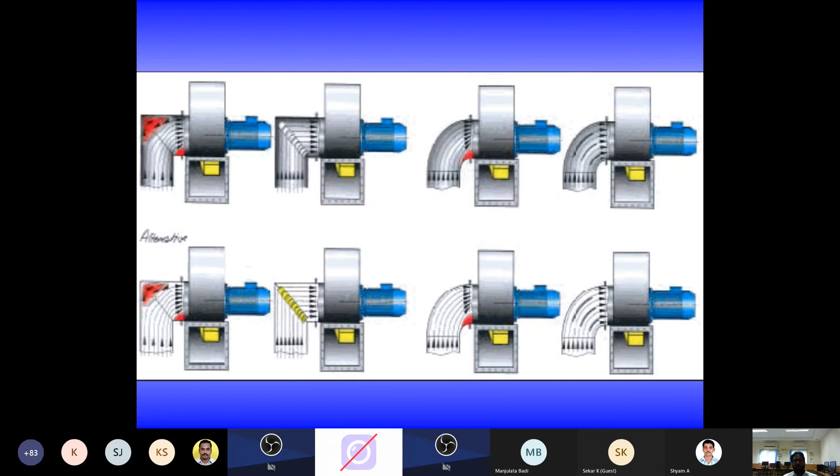Now you can see this slide. The inlets—if the inlet is in a direct 90-degree configuration, you know what the condition is. There will be some pressure drop which will be more than with a round bend, and when you have a long radius bend, it is going to be much better. And if you reduce the diameter near the fan, there will be more losses. This is about fan inlets.

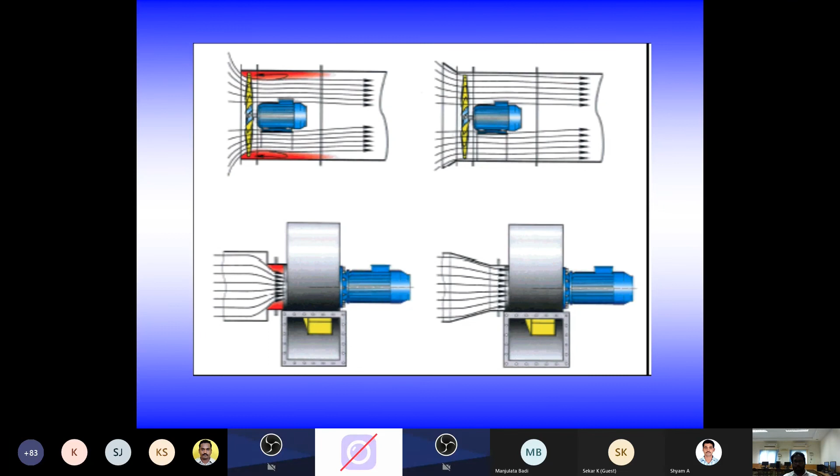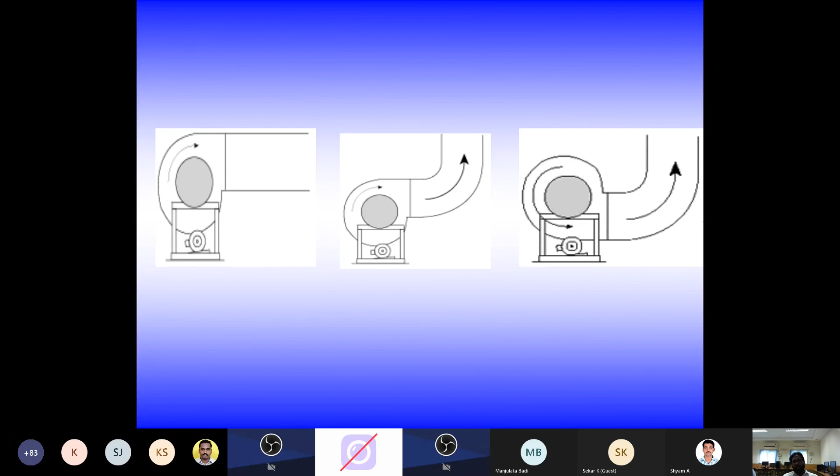There are other factors, where when the fan is assembled, or sometimes removed for maintenance and put back, or when we audit the fan, these things have to be checked if possible. Because a higher cone gap—this clearance between the inlet cone and the impeller mouth—the higher the gap, the higher the recirculation, so then your efficiency will drop. The minimum the gap, the better your efficiency. So you have to maintain a uniform cone gap all 360 degrees around the circumference of the inlet, and the clearance should be as minimum as possible.

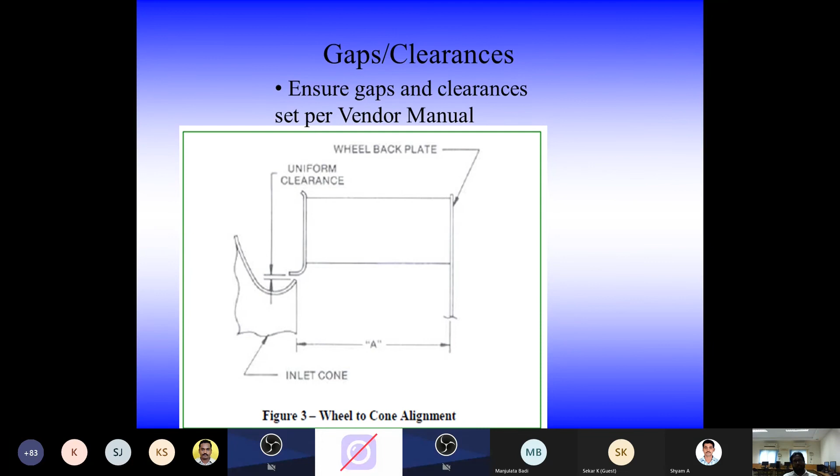In the case of the axial flow fan, the radial clearance, or running clearance, also has to be minimized. If that is not minimized, you will have the same recirculation problem over here.

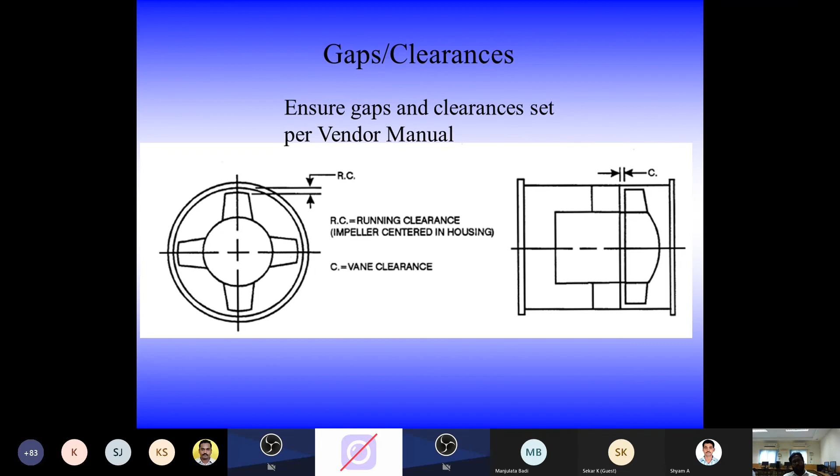We have to understand that the capital investment on these fans is only about 5%, whereas the operating cost over the years is going to be 95%.

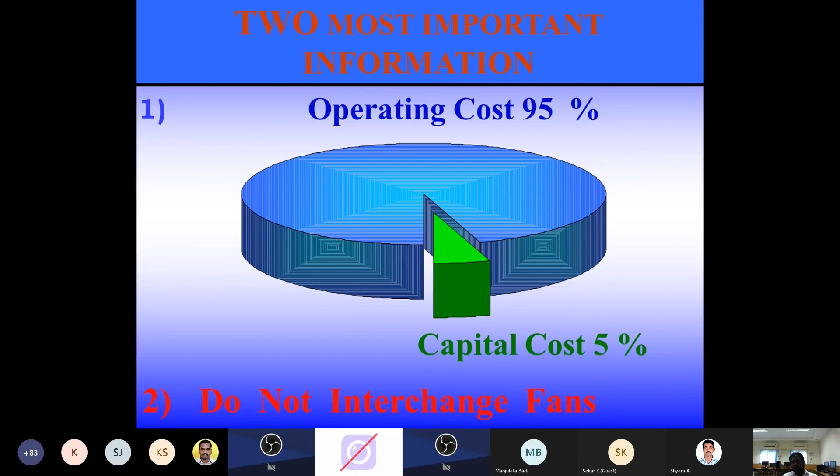We should not interchange fans. Each fan is tailor-made for every application and every parameter. For example, for 300 meter cube per second and 500 mm water column, there is a specific fan. But if you have a requirement of around 250 meter cube per second and 400 mm water column, you cannot take that fan and put it there. It will operate at part load, consume more current than needed for the higher capacity and pressure, and you will be losing power as well as efficiency.

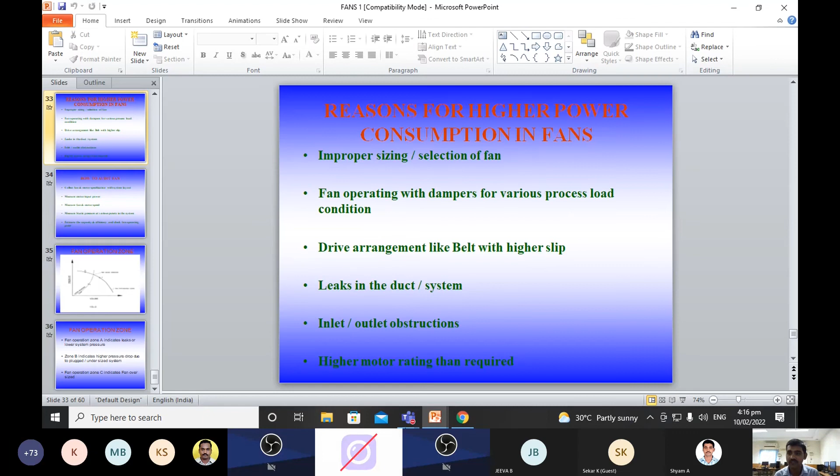Thank you, sir. Thank you very much, sir. Thank you, sir.